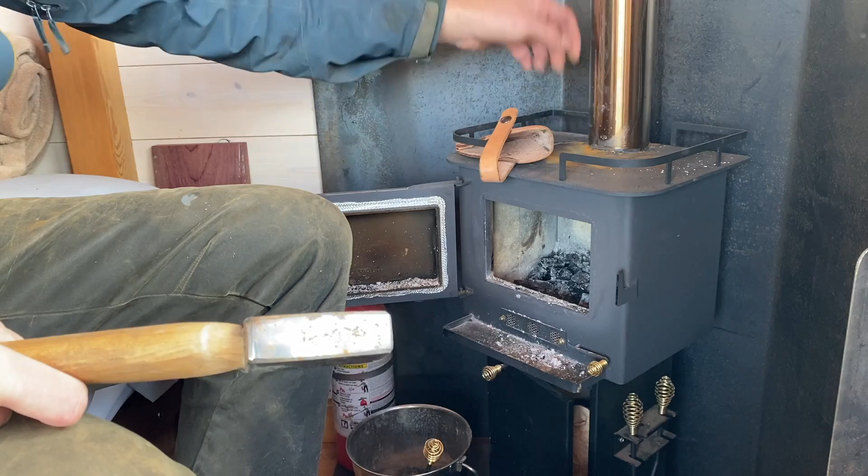I haven't run the little wood stove in here for a couple months now, and a little bit of rain has come down the chimney pipe, causing a little bit of rust on top.

The only way I plan on dealing with it is putting a bigger cap on the chimney, because there's pretty heavy rains and really driving wind out here, and that's what kind of drives the rain into the chimney pipe. But it's really minimal, so I'm going to put a bigger cap on it and a little wind blocker on the dominant wind side, and that'll deal with the issue. But nothing compared to the fiasco of when I first installed it.

Left the unburnt charcoal in there, so it should start up pretty good.

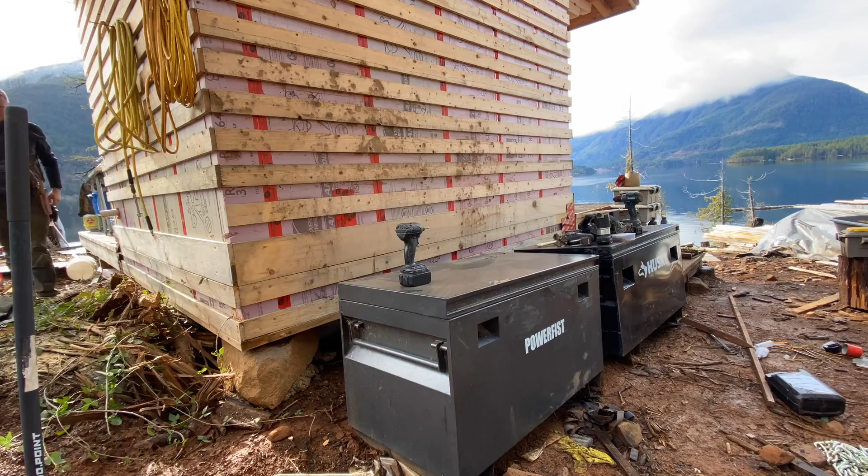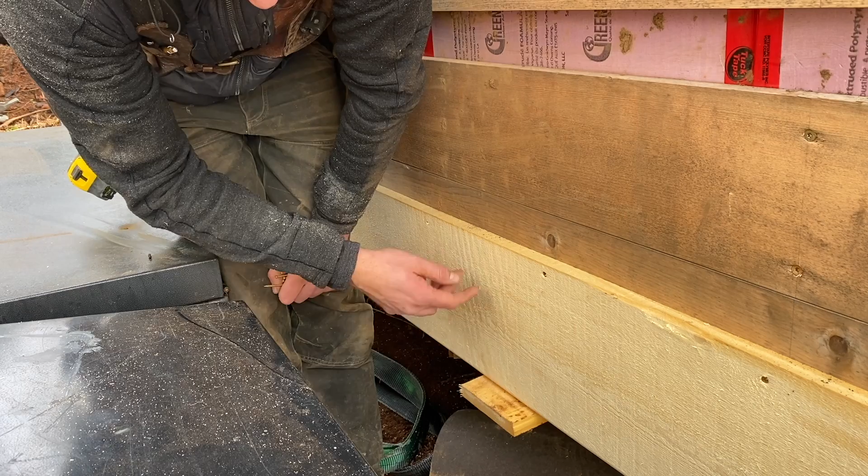All right, so I'm putting a 1x10 yellow cedar belly band, fascia, whatever you want to call it, down around the bottom of the cabin here. And then I'm going to be adding a 1x4 strip just to double it up to kind of match the fascia up on the roof. That's going to give me enough thickness to then flare my shingles out over and give it a little flare. I love that flared shingle look.

Along the top here, I'm using these larger U2 2.5 inch construction screws, which are great. They have a wider head on them, unlike a standard screw, and they pull it in, and that's going to get covered by a 1x4.

And then along the bottom here, where you're going to see the screw heads, I'm using these trim head screws, 3-inch trim heads. If you look at this, see that? That's the difference between a lot of different screw manufacturers and U2. It's just the quality, right? The machining, that it just sticks on there.

So I've got about a 3/4 inch step before the meat. Got decent pull, obviously not as much pull as a wider head screw, but it does suck it in a little bit. So I'm just doing that about every 16 inches or so.

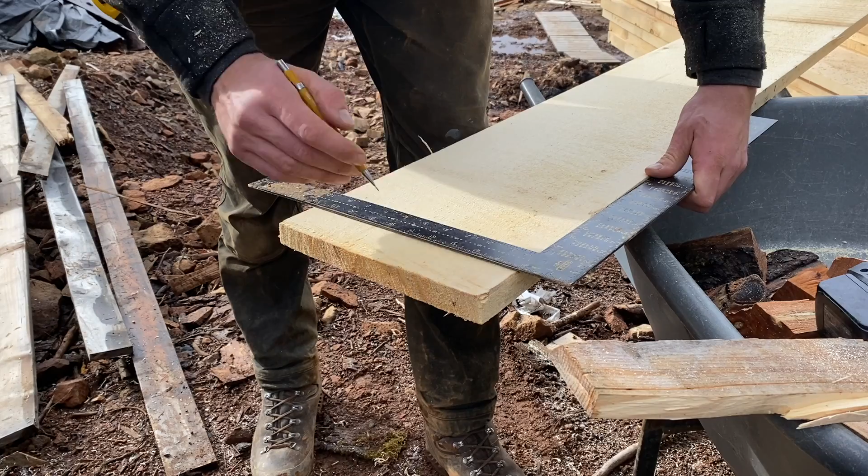Okay, always set your saw to 1 degree past 45. That way your point of your miter is always going to be nice and tight.

Yeah, it's looking pretty good. Nice and flat. Yellow cedar, because I kept it tarped really well, didn't cup or anything in the heat of the summer, last summer while it was sitting here. So it's still really nice and flat, which is great for getting these miters together.

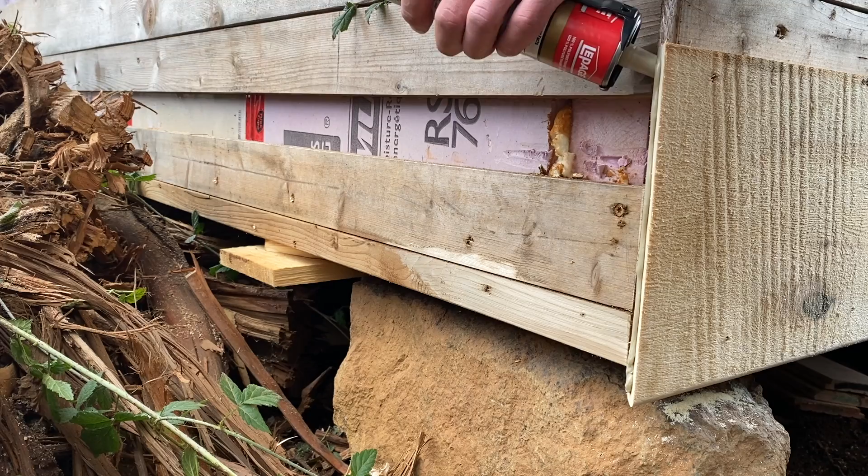And just using some premium construction adhesive to glue my miters so that they don't pull apart on me.

Ah, come on. Framing's a little too far out. So my framing is a little proud here. Even though I cut this miter square, the framing kind of bumps out at the bottom, so I'm just gonna have to grind this back a little bit with the saw to be able to pull that in tight.

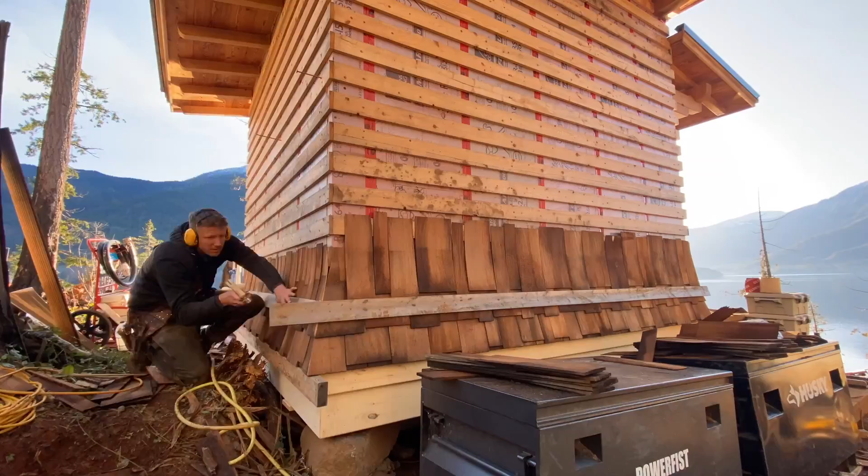Beauty day to be on the water. A little chilly though.

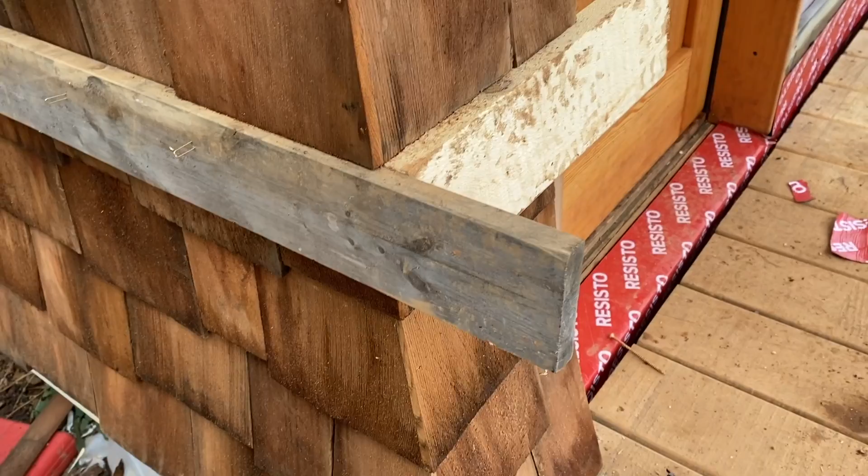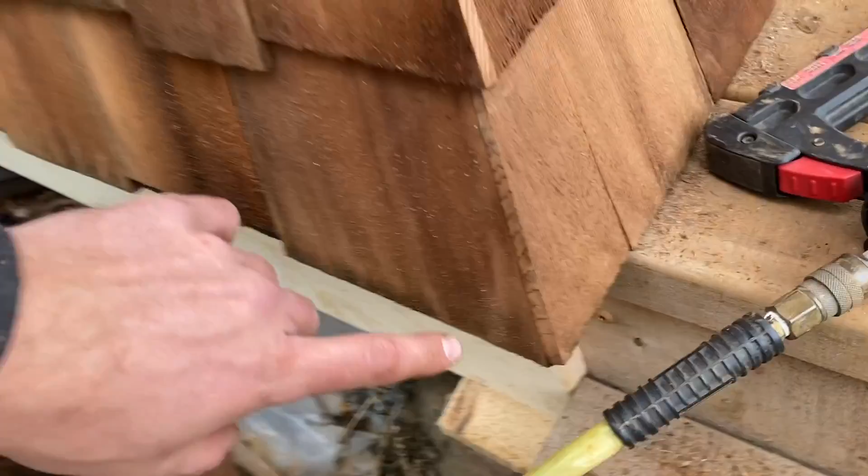You want to always have a nice tight butt joint, and then you also want to alternate them. Oh, did I? Dang it. Good thing I decided to video that clip and show that I did it wrong. Right, so see how I alternate it? Butt there, butt there, butt there, butt there. Then I did that one there. So I need to flip that one around. But it was a really nice joint. Now I gotta rip it off. Derp.

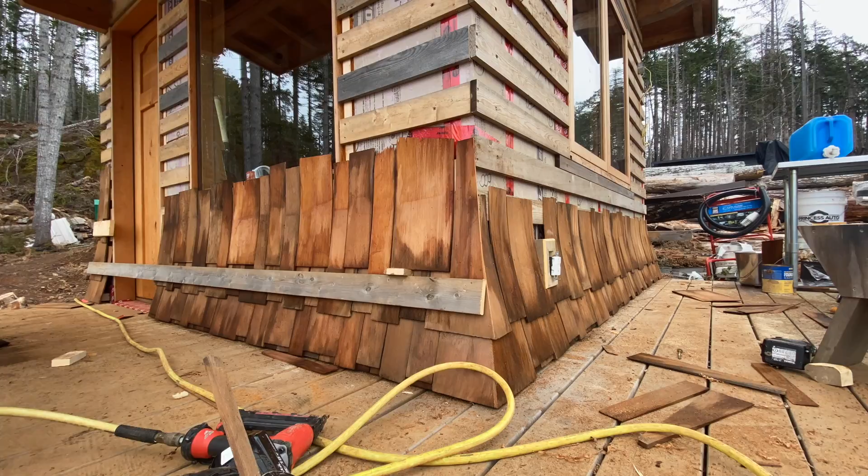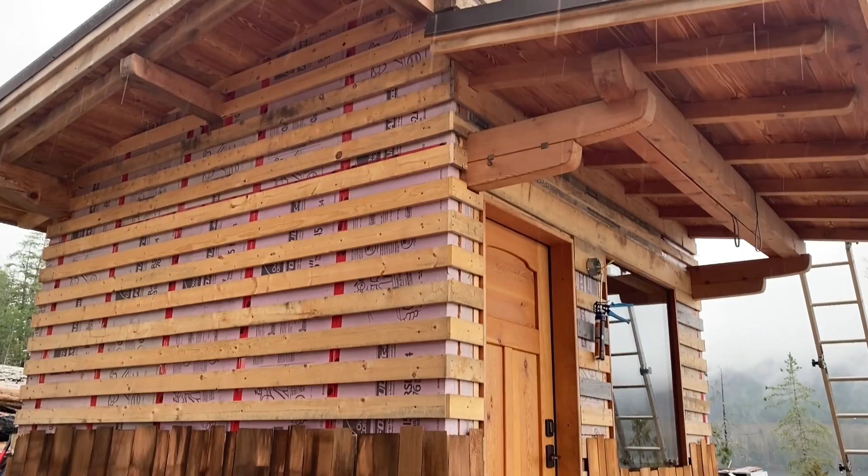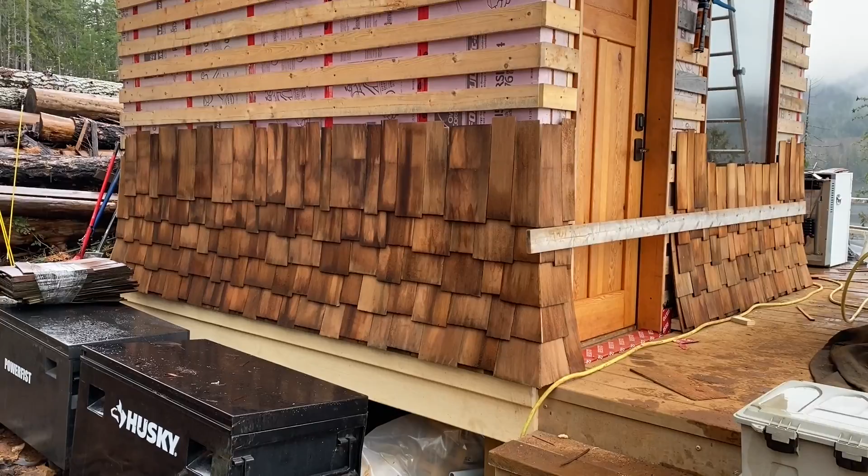Got my own steam sauna.

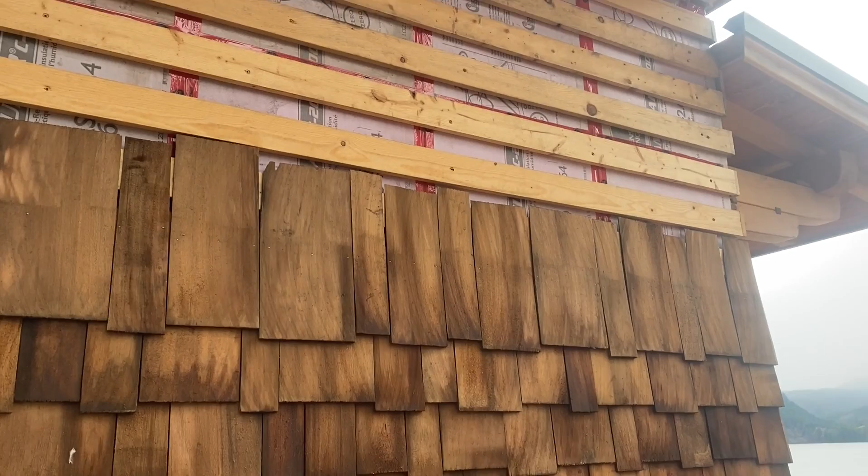This place is getting pretty messy here, but we're about two-thirds of the way done. So I'm just gonna keep plowing ahead and we'll do a big cleanup when we're done.

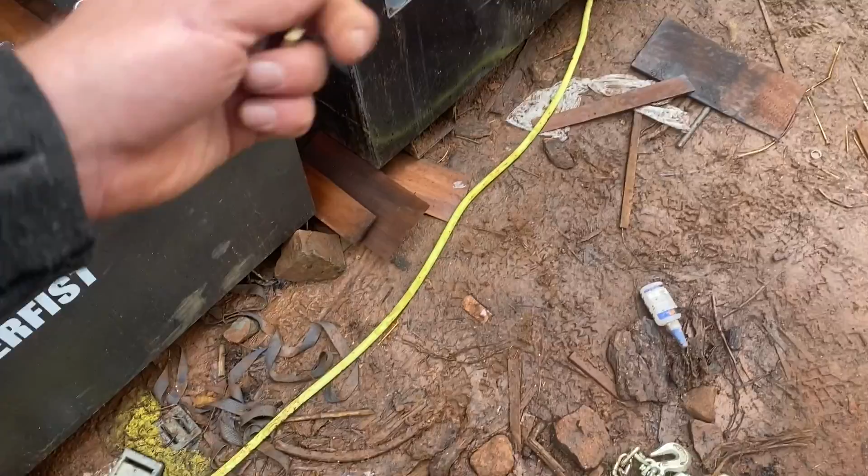These locks, I got this 8-pack of locks that are all keyed alike at Princess Auto. Pretty beefy locks, nice and thick. I've had all these different keys for different pairs of locks, and it's clogging up my keychain, the more stuff I have to lock up. So now I'm just putting on all the same locks because they're all the same key. I've got two here, two there, another two on that other lock box that's behind the trees somewhere. That way I only have to have one key on my keychain to unlock all of them, which makes life a lot easier, especially as I get older and forget which keys are for what. So take the time to make sure your life is as streamlined and simple as possible. That's my advice to you.

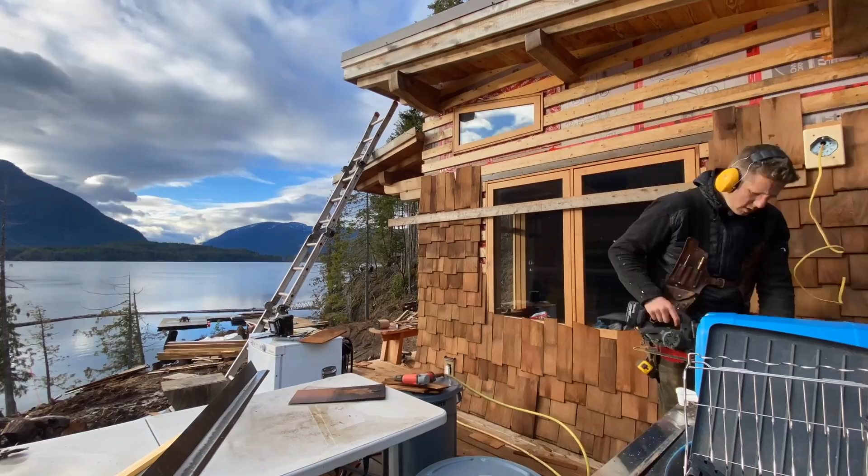We just had a nice little hailstorm pass us by, so I decided to just head inside for a little minute, rearranging my battery setup. But sure enough, another little swatch of blue sky. Hopefully it'll open up again. It was sunny like 20 minutes ago, gorgeous, and then it just rolled in real fast. Honestly, it's way better than television out here, just watching the weather systems pass by. It's just unbelievable.

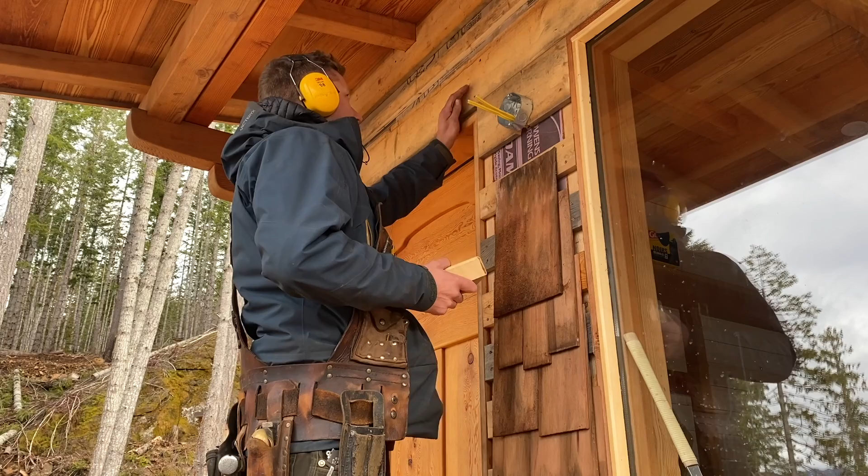So now that I'm approaching all the light boxes and the tops of the doors and windows, I don't really need to flash the top of this door and window because it's got such a large overhang, but just so that it matches the windows on that side, which I am going to flash, I'll just flash them all. It's good practice to flash everything. So I'm going to cut the headers, and then I can have a spot to set my flashing on top, nail that in, and then I can start shingling up around that. I'll still be able to cut in the side trims afterwards, and maybe I'll have to just use a knife or whatever to get up right where the header is, because they're going to have a bit of an overhang.

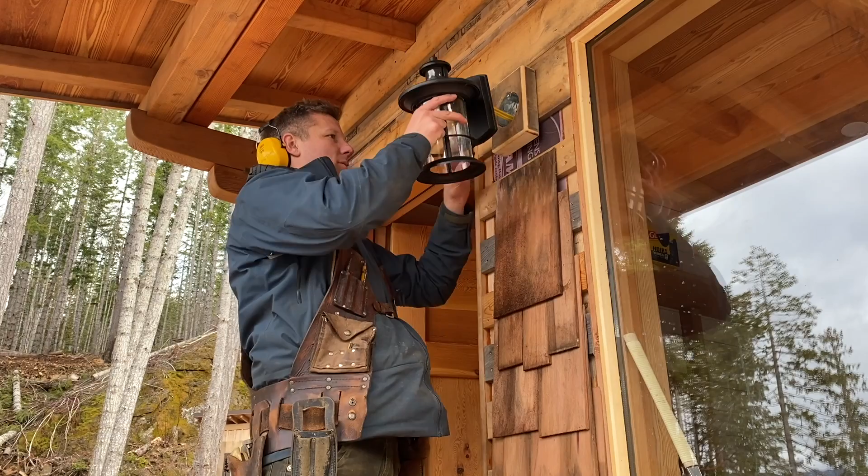But I need to put these blocks around the light boxes here, just so that when the shake comes up, it's about one inch thick, and I want to have a nice flat surface for the sconce to sit against, which I think looks pretty sweet. Maybe if they were a bit smaller, but I don't think I'll hit that. I'll have the bench right here, so you kind of walk around that, so hopefully nobody will catch their head on it or anything. Looking backwards, I was like, oh maybe I should have put it up here, but I didn't, so it's going where it's going.

So I'm just using a couple of these U2 3-inch screws.

These ones also have a motion sensor on them, so when you walk up on the porch, they just automatically turn on. That was kind of what sold me on them, because I don't want them on all the time, draining my battery power, right, because I'm on limited power here with the solar setup. So they'll just come on as motion occurs, which is perfect. It's energy saving.

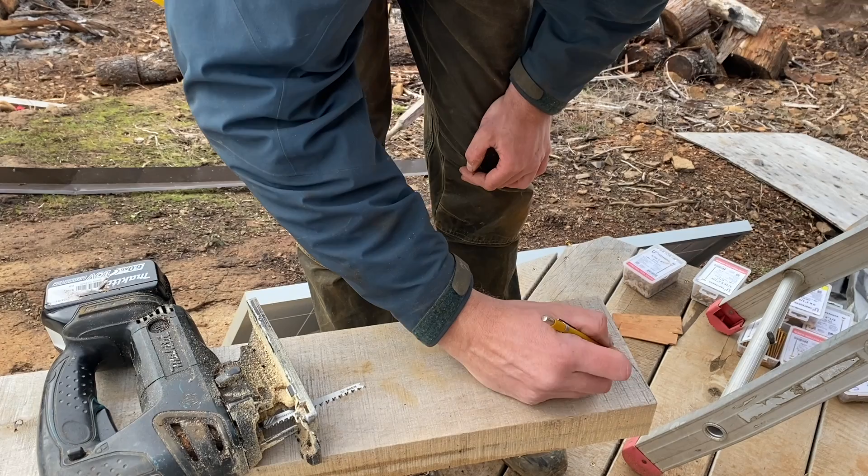So that's the profile I came up with for the door header, or the headers over the windows and door. I might just adjust it a little bit.

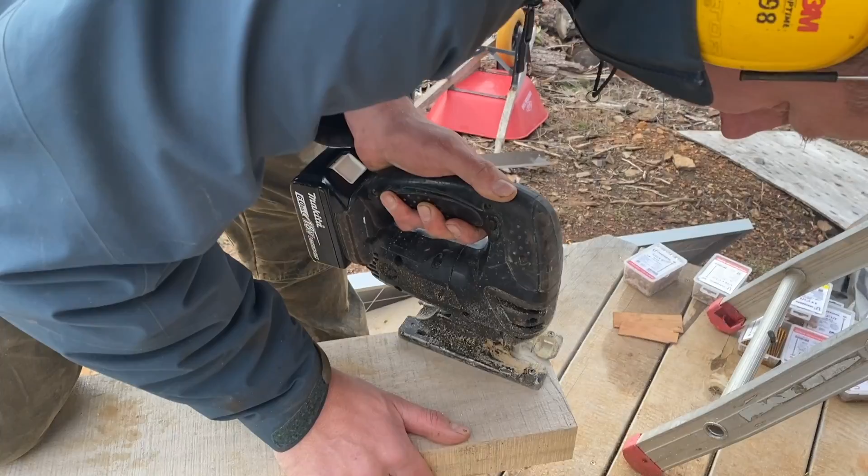Not very, for a progressor blade, it definitely didn't progress very fast. I think I might just try my other standard wood blades that I got.

Let's pre-start my finishing screws here.

Now I can set my flashing on top, get it really in there snug, nail it down. And then if I want, in order to cut the shingles or to have an easier time scribing it, I can just unscrew that and pull it out, right? With finishing nails, good luck.

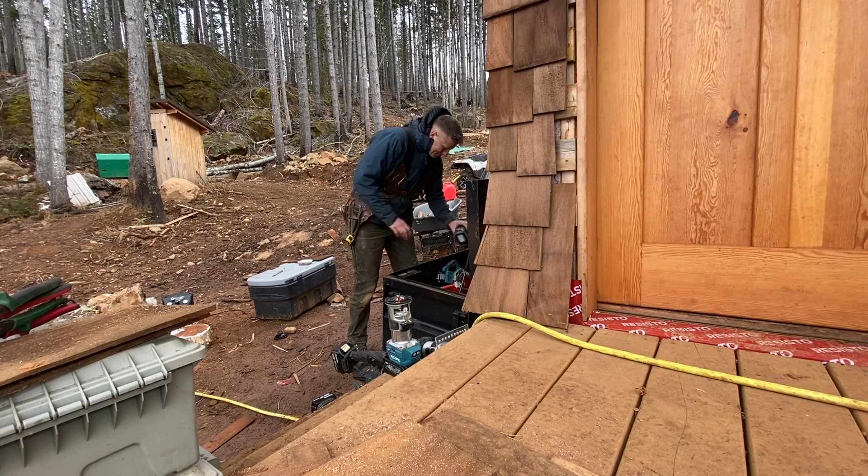Ugh, it's always that last push, you know? That's what gets you. I was just kind of like, oh man, we're going so fast. Nothing in our way, just course, and then it's like, get up near the windows, now I gotta deal with the headers and the flashing, going around the beams and the roofs, and I'm just kind of like, so much harder.

What can you do? That's just the nature of the beast. You just gotta push through. You know?

Buddy Adam's not here to help me. All I gotta do it by myself. There's always these excuses, you know. Where does that shit come from? It's just the mind. It's all just, you're fighting yourself, Jesse. Just get on with it.

Get on with it. You expect somebody else to build your dreams? It's your dream, you gotta build it. You designed it this way. Why are you complaining that it's hard?

You're the one that's angry because you wanted to get it done in 2 weeks. But if you just let go of the expectation of getting it done in 2 weeks, is it that big a deal? It's just cutting wood. That's what you do all day. You know? It's like we're just setting ourselves up for disappointment. But it's us, we're doing it. Life isn't disappointing us. Life is just life. Whatever we encounter.

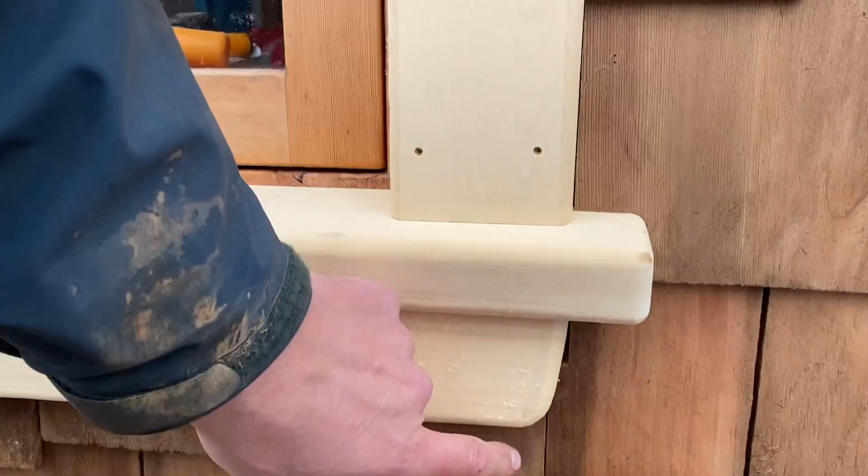Yes, I will. I got this window trim though, which looks pretty sexy, if I do say so myself. Problem is on the apron here, I kind of profiled the ends and didn't realize that I'd notched the shingles straight, and so the profile shows this little gap there, which is not very pretty. So, dang it.

As nice of an apron as it is, I'm gonna have to remake it. The good thing is, little tip for you guys, when you're trimming windows, you always start with the biggest window first. Why, you might ask? Well, it's pretty obvious. When you screw a piece up, you can cut it shorter to fit one of the smaller windows. If you start at a small window and you screw up, then you just gotta throw it out because it's not gonna fit any of the bigger windows. So I'm just gonna use this apron and cut it shorter and use it for that front window.

Not too big of a waste, and I'm just glad the profiles worked out. That was kind of the main thing. I wanted something a little unique, other than just a straight, blah apron, to match the cool looking header there. So I like the profile. Don't care if you do or don't.

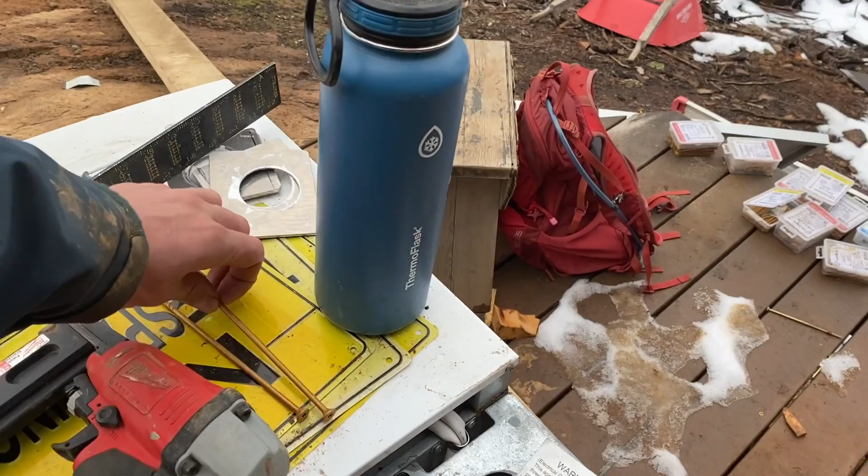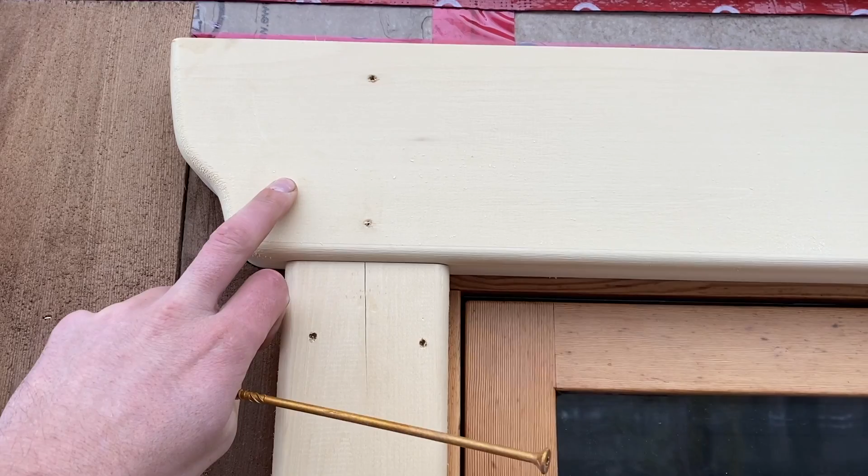I like it, and I wanted to show you guys another trick here. I got these big, I think they're 10-inch U2 screws, construction screws or universal screws. I'm going to put one in here to hold this header, because this wood isn't completely dry. A lot of times what happens when you do an exterior trim is you put it on, and as the piece shrinks, you get a little gap forming right there, and it's fine if you're painting and caulking it, but I'm not, and I want it to stay tight. So I'm going to drop a screw in here, and the nice thing is, because it's got this smooth part of the shaft for the full thickness, it'll act like a clamp and really pull that down tight. Then as it shrinks, I'll sink the screw in a little deeper to create positive pressure, and it'll keep that joint tight.

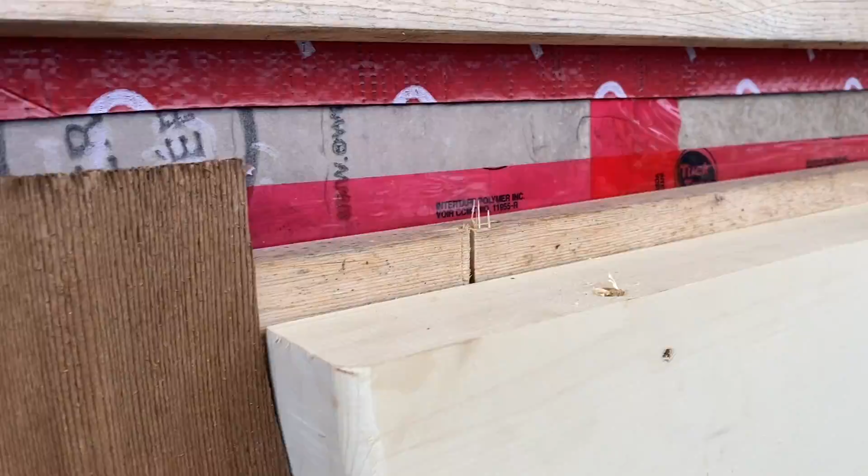I always put a little bit of angle, like I start closer to the front edge of the header and then angle it back, so that you don't by any chance blow out the front or the side. So now I can flash the top and not have to worry about any gaps forming there.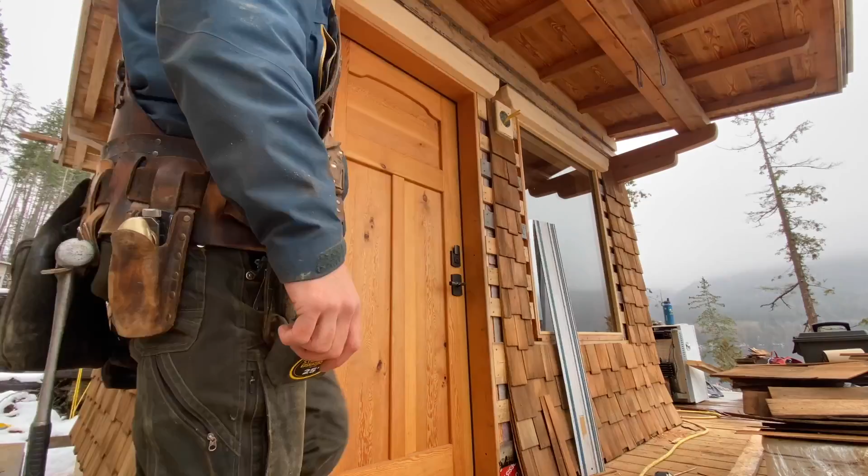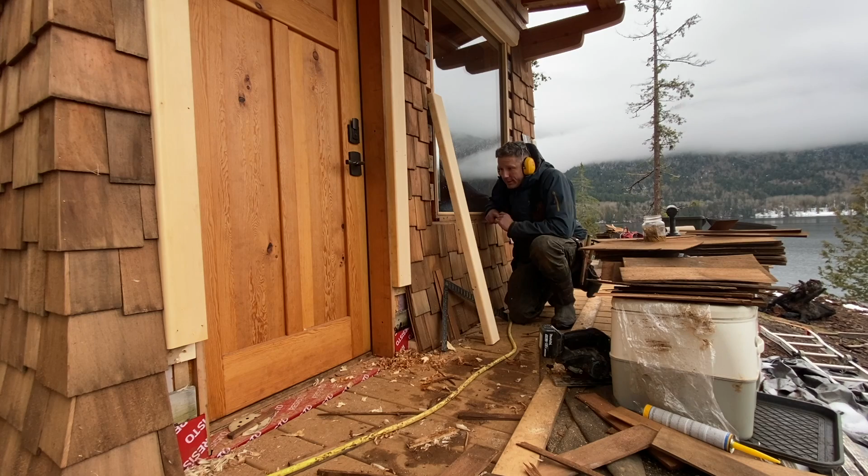Having a bit of a day here, guys. Got these beauty clear yellow cedar trim pieces made, and then I square cut them on both ends, and the bottom end is supposed to have a 10-degree slope on it for the sill to slope. So thankfully this window is not the last window, and there's a smaller one up top in the loft, so these pieces won't go to waste.

If you guys think I make this look easy, let me just tell you, it's not easy, and I make brain fart mistakes like that all the time. Just have to keep pushing through. Ugh.

So I'm going to plane up some new ones, cut them correctly, and then hopefully we can get this window trimmed out. But I was hoping to wrap up the whole thing here in this video, but it's just not going to happen, so I'm just releasing that expectation, and we'll clear it up in the next one.

But for those of you who are feeling disappointed because you wanted to see it all done and finished, I get that. As a reward for watching this video, I'm going to show you what I'm designing for my main house. Check this out.

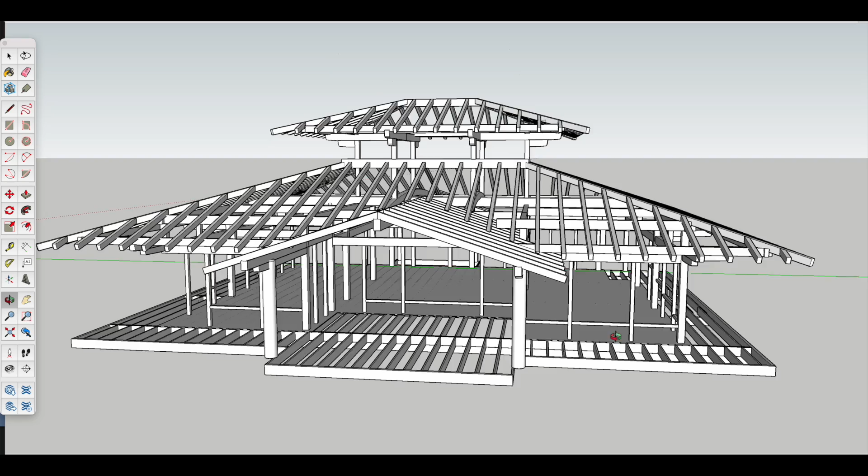This is it, guys, so far anyways, I haven't got all the pieces in, obviously. I need a little beam going across here to support the ridge, and who knows, I might not even be able to build anything like this once I take it to a structural engineer and have them look at it.

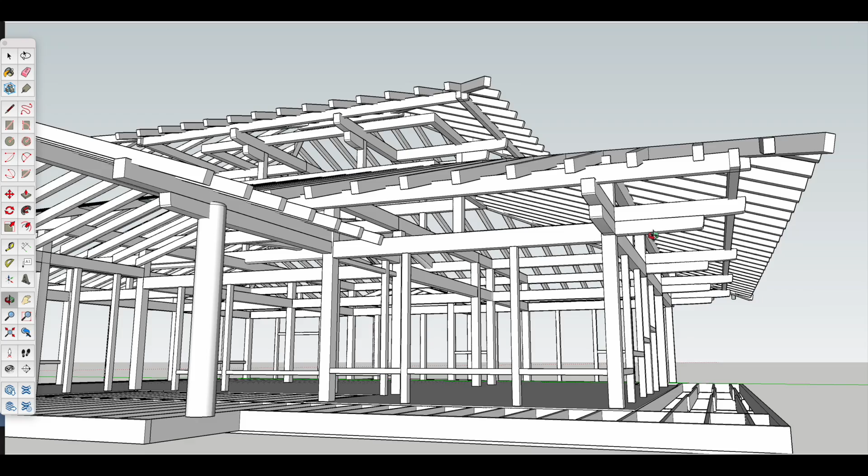I know I'm getting a little greedy here with this large overhanging, kind of cantilevered roof. From my standpoint, I think it's doable with the joinery and as far as strength and being able to support that roof, but I don't know if it'll meet the snow load requirements or whatever calculations the engineers have to make. So I'm hoping I can pull it off, because I just love this large overhanging roof.

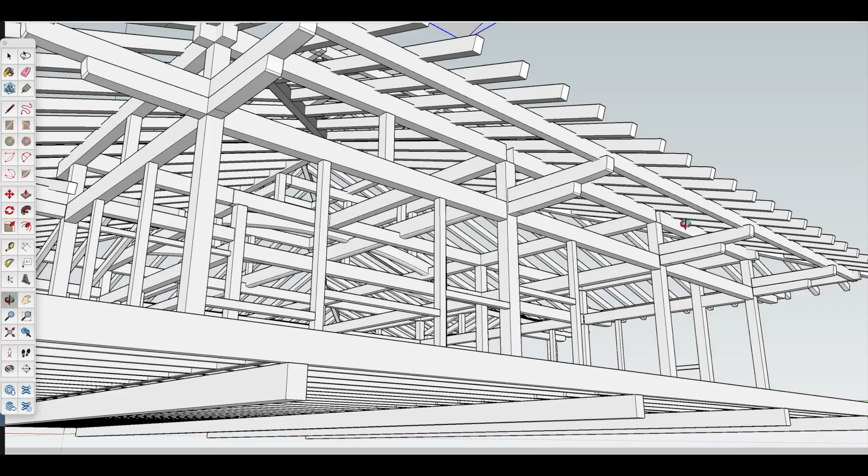There's going to be angle braces going up in these little transom areas, which will essentially create a really large timber truss frame going around the whole perimeter of the house, which should be insanely strong, as well as a truss frame going through the middle, kind of holding everything together. So plenty of load bearing. I believe I've kind of over-engineered everything here, so it should be pretty safe, but I'm sure they'll have to add certain elements to make it pass all of their calculations.

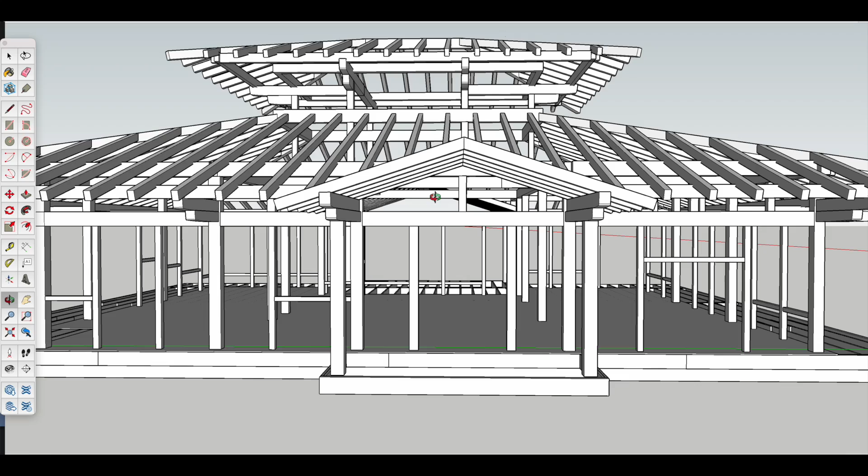So this is the front entrance, which will be on the north side of the house. The rock bluff area, and then the lake and the little bunkie, etc, will be down below on that side. So you'll enter from the back here.

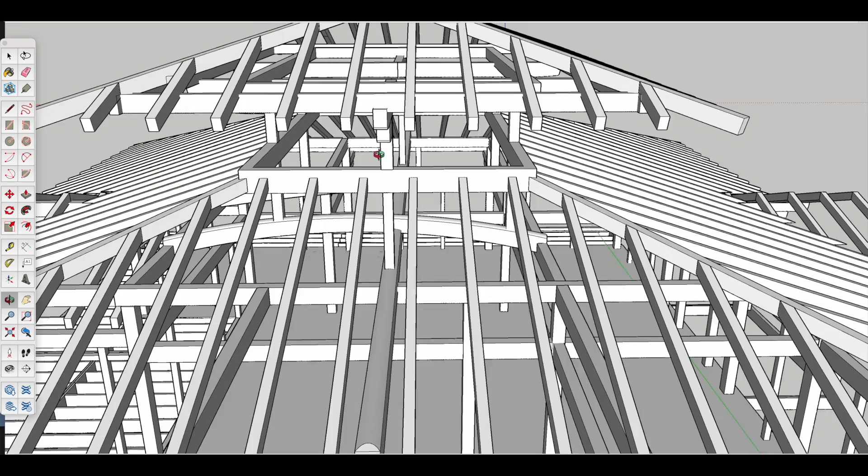I've added this clerestory, as you can see, which will let in a lot of natural light and hopefully minimize my need for running lighting during the day and save on power consumption.

Got really large overhanging eaves just for the summertime sun. It should cut down on the direct sunlight coming into the house, which heats the house up and makes it into a hot box in the summertime. And then in the spring and winter or fall months, when the sun is lower, it should be able to come in and warm up the house a little bit.

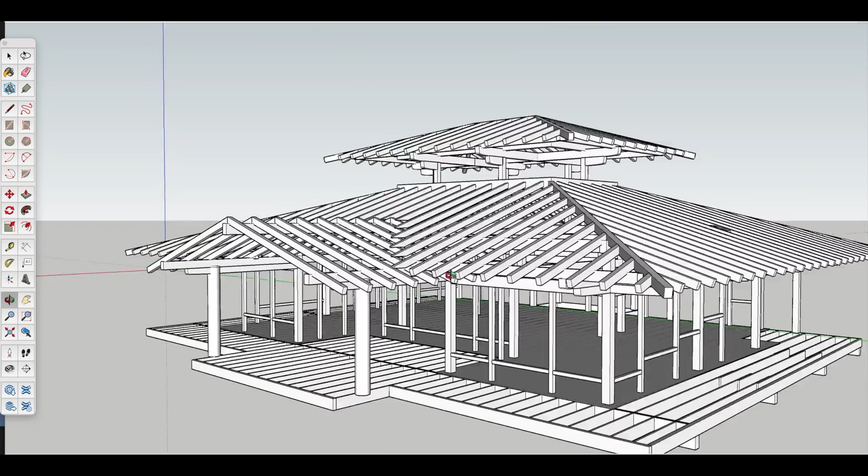So that's why I've got the large eaves, as well as just having a nice dry space outside to walk around your house year round, especially with the super wet, soggy winters that we get, would be just amazing.

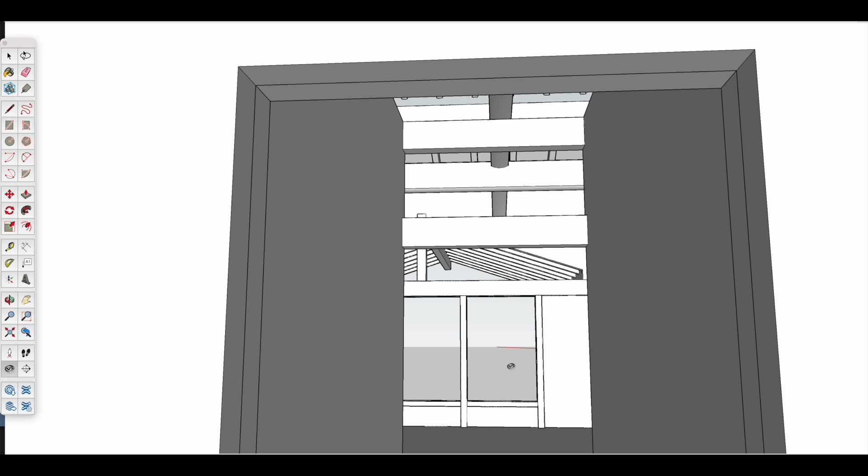All right, so with the walls in place, this is entering from the north side, coming through the entry hallway into the living room. So this will all be exposed timber work, some nice curved beams notching over each other.

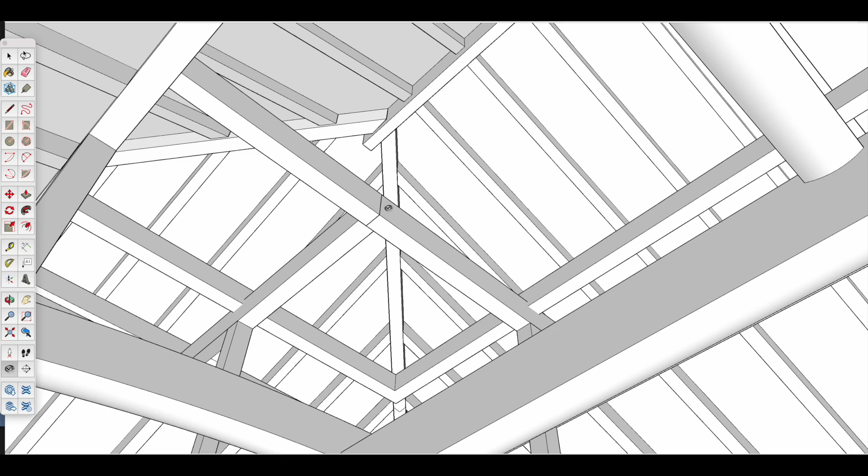Kind of Japanese style. You're looking up into the clerestory there, and we'll have some through tenons and joinery and wedges all visible, which is going to add just a lot of really cool visual elements. Coming into here, we got the nice stepped windows.

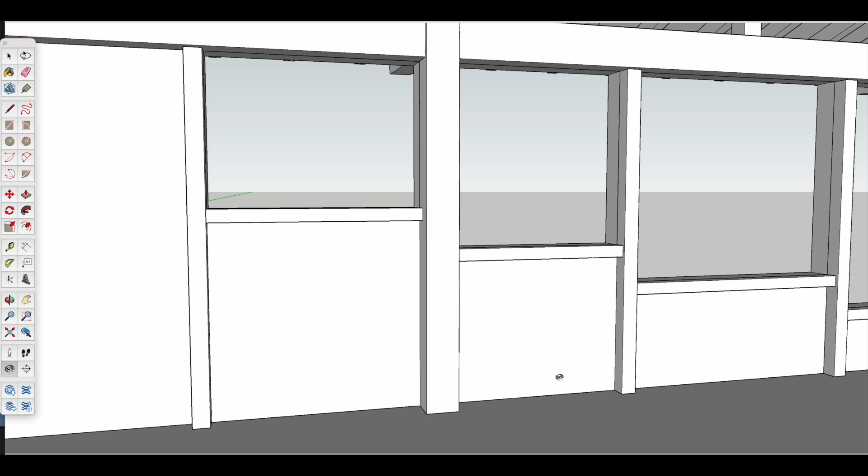So kitchen will be over on these two walls with an island in the middle here, and then this will be the dining room area.

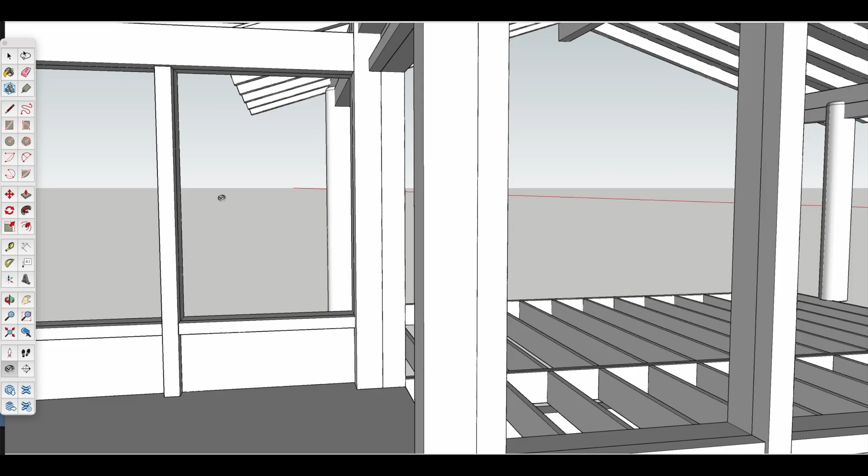I think I'm probably going to have built-in kind of bench seating on these two walls, just so I can snug the table up a little closer because the footprint of this house is actually pretty modest. It's only about 1,600 square feet, which is the allowable size limit for this zoning, being off grid and everything. They don't want people building giant houses and then not being able to power them, being off grid.

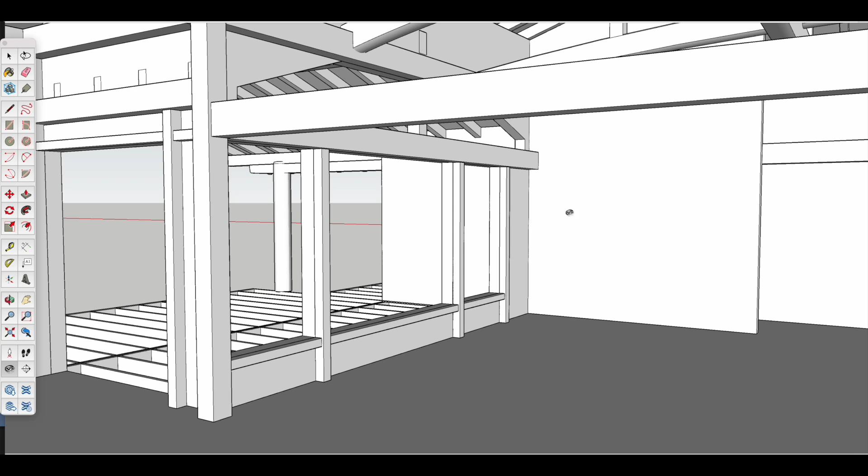So I've just added a lot of outdoor covered deck space to kind of make up for square footage in that regard. And then we've got the living room area, which I'll have a stone fireplace in the corner going up here. And then if we jump across the hallway into the master area.

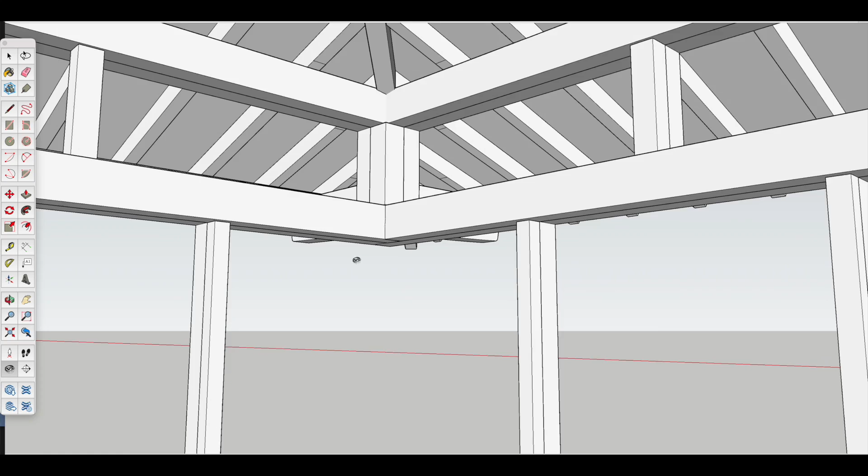I don't know if this is possible. It doesn't seem like it would be. These trusses are going to be really strong, but we're also dealing with the really large overhanging roof there, so I might not be able to pull off the floating corner, but man, that would be awesome if I could. And I would have kind of two big doors that would either swing or slide away, so I'd have to come up with a pretty clever latching mechanism for that, but it would be really nice if I could pull that off. That's kind of like my big challenge for the build here.

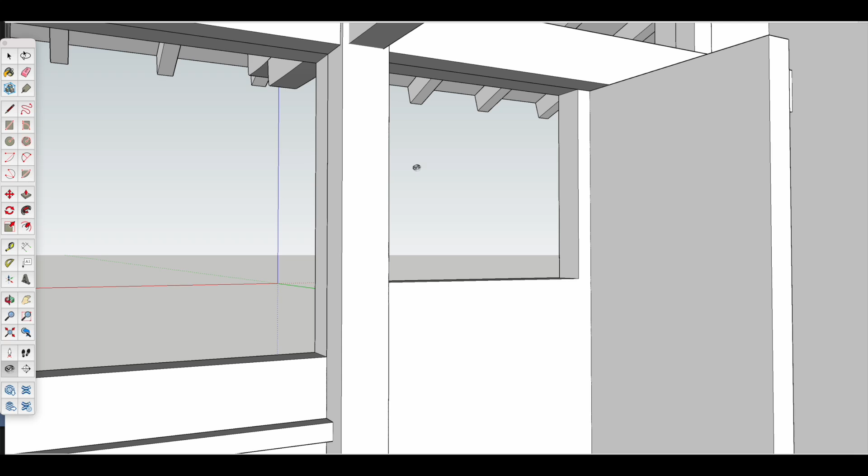And then this will be actually like a glass wall going into our bathroom shower here, and vanity, toilet, that sort of stuff, and then closet kind of off the bathroom.

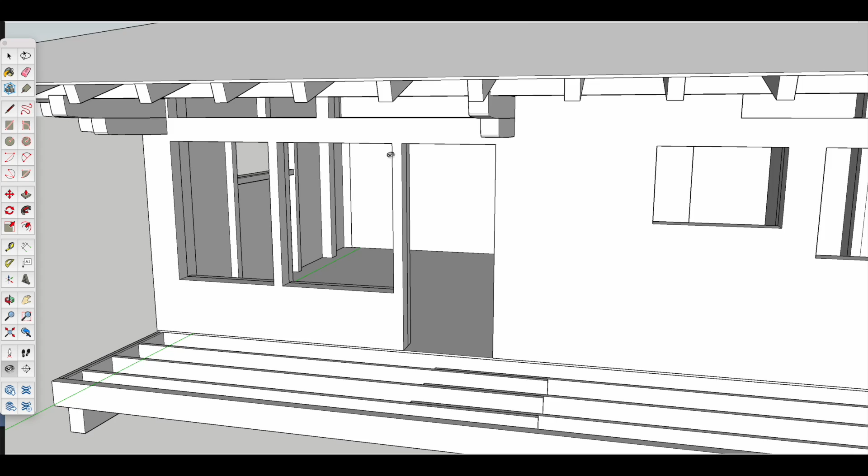And then moving down the sideway, covered walkway, porch, whatever you want to call it. This will be the boys' room here, with their own little entrance in from the deck.

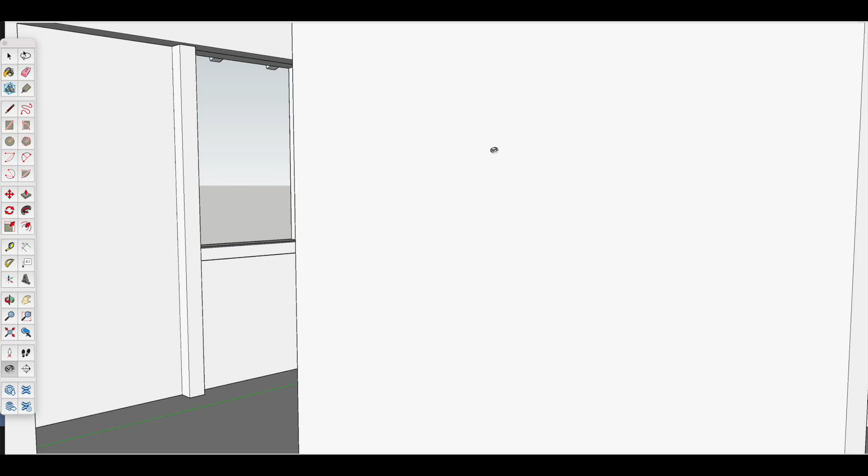And then we've jumped through the walls here. That's the mudroom there, going out the side entrance, as well as my son's room, and then the main bathroom area in here. So we'll have a double vanity along here, toilet area right here, and then tub shower on this wall.

So anyways, I hope you guys are as excited as I am to get going on this. It's probably going to be about a year before I start cutting this frame.

I'm going to be building a smaller auxiliary cabin closer to the lower cabin that I'm just finishing up. I'll do that first so that we have a little bit more of a usable space to cook and hang out in and work from as we get to work on the large building here. So this is going to be a process, and I'm not rushing it because this is what I've been looking forward to pretty much my whole life, my whole adult life, and I want to savor every moment I can.